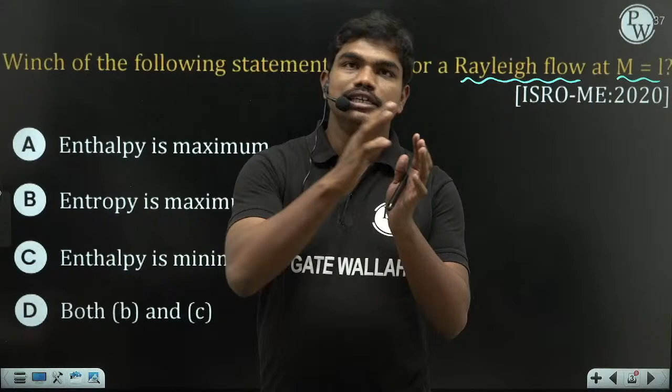So let us start solving these questions. Which of the following statements is true for Rayleigh flow? Okay. So Rayleigh flow at Mach number is equal to 1 basically here. Mach number is equal to 1 is, like last time also we discussed, the transition basically; subsonic flow से supersonic flow के बीच में actually Mach number is equal to 1 हो जाएगा.

And now if you see what are the specialities of this Rayleigh flow. पहले Rayleigh flow क्या होता है? So let us study that. Rayleigh flow is like flow in a duct, 1D flow in a duct.

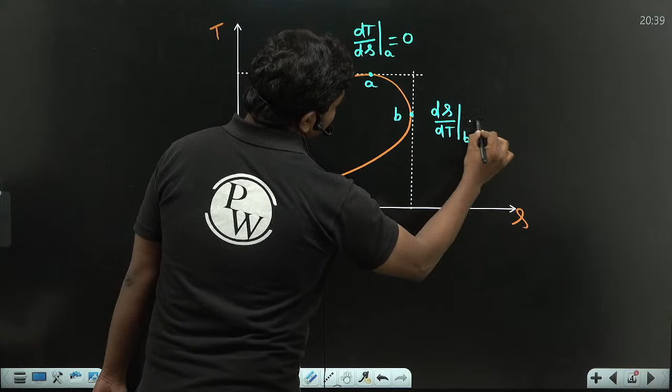And मैं detailed analysis नहीं कर रहा हूँ अभी लेकिन if you do this analysis you will understand certain points, that at this location Mach number का value होता है Mach number is equal to square root of 1 by gamma actually here. Okay. So gamma is adiabatic index of this ideal gas. Adiabatic index of ideal gas.

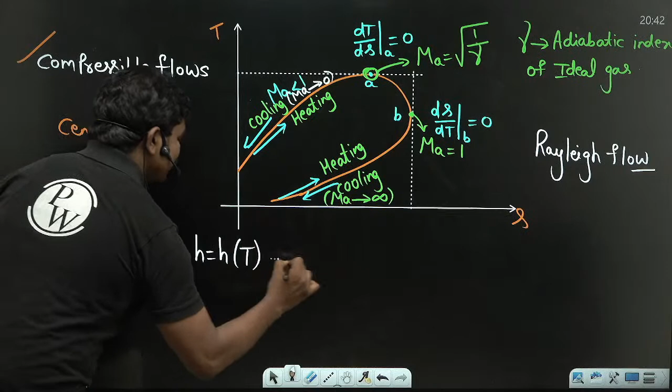Enthalpy is maximum. Tell me one thing, अगर आइडियल गैस का एंथैल्पी मैक्सिमम होना चाहिए तो टेम्परेचर क्या होना चाहिए? What should be the temperature if enthalpy has to be the maximum? It's an ideal gas, okay. So at ideal gas, if enthalpy has to be maximum, what should be the temperature? Temperature should also be maximum, correct? Yes or no? Type in the chat box.

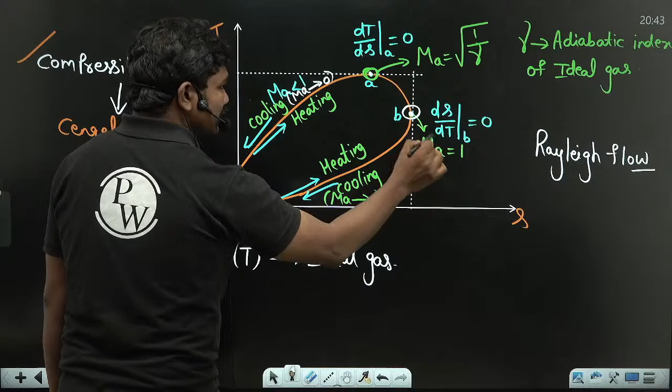Entropy is maximum, बिल्कुल. So you can see this is the point where ds by dT is 0 actually here. So therefore in this case, even though there is a temperature change, ds is basically 0. So s has achieved a maximum value here, okay. So this value is S max, and correspondingly this value is T max. Of course if T maximum है तो this is also the location of H max actually here. So entropy is maximum, this statement is true.

Enthalpy is minimum, no, क्योंकि बहुत सारे पॉइंट्स होते हैं जहाँ टेम्परेचर इससे नीचे होता है, okay. So therefore this point is also wrong, so definitely both A and C are wrong. So entropy is actually maximum at Mach number equal to 1, and this concept is very very important. Normally the concept of normal and oblique shocks, please go through this chapter before going for the examination, from that particular book Cengel, okay.

So please type in the chat box, are you all clear with this question? Everyone, please type in the chat box, are you all clear with this particular question?

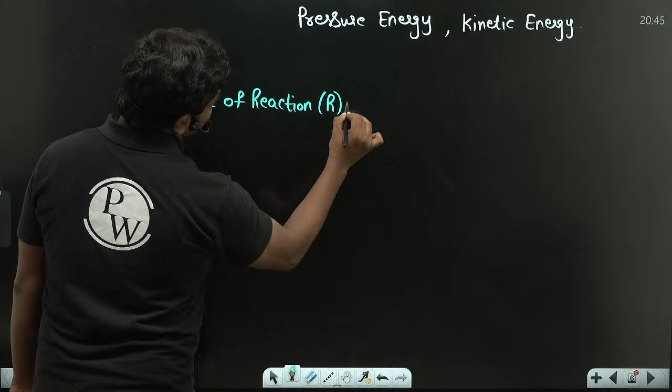Kinetic energy. Now depending on the availability of the pressure energy at the inlet, we define a quantity called degree of reaction, normally denoted by R. This is equal to change in static head, or pressure head, in rotor - it's a standard definition in all turbo machines - divided by total change in head in the stage. Suppose state 1 to state 2 you are compressing, then in this complete compression we will have some part because of change in pressure head, and total compression is there. This ratio is called degree of reaction.

So therefore, change in static enthalpy rise in the rotor - so this is actually the ratio of static enthalpy rise in the rotor to static enthalpy rise in the complete stage. This is not in the stator, but in the complete stage. So this is total change in head, static head, in rotor, divided by total change in static head - basically the pressure conversion in stage. Out of this total stage, whatever part is in the rotor, that defines the degree of reaction.

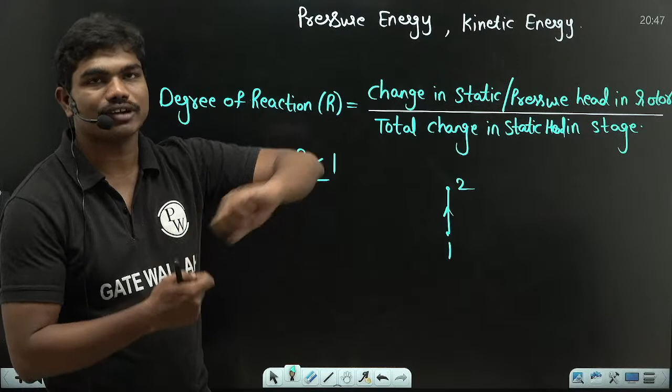And for impulse machines, like impulse turbines, this value will be 0 - degree of reaction equals 0 in that case. But some machines like Francis turbine, Kaplan turbine, and normally compressors, have this value of R changing from 0 to 1. Generally the theoretical range is 0 less than R less than 1, which is change in static pressure head in the rotor divided by total change in static head within the complete stage of compression. This definition is even the same for turbines.

So therefore this value is option C - option C is actually the correct answer, because this is the exact definition. Rotor to static enthalpy is wrong, but rotor to static enthalpy rise in the complete stage is what we consider in this definition of degree of reaction. This definition is a very common and standardly asked definition in all turbo machinery problems.

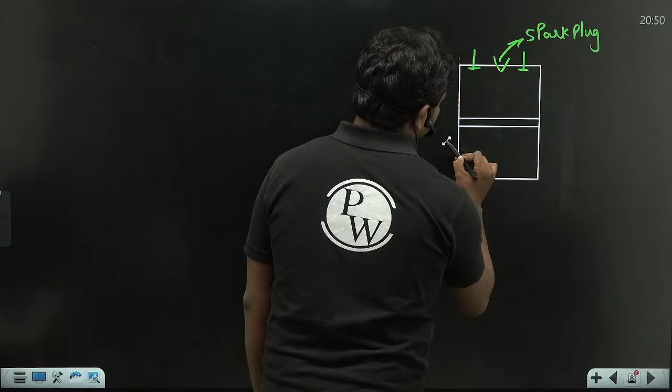So this is the piston, and at the bottom you have the crank, the crankshaft, all these things are here.

Now, in the beginning of the compression stroke, when the piston is at the bottom dead center, when it moves to the top dead center finally, meanwhile if the octane number of the fuel is low, what happens at that time? You will have small pockets of fuel getting segregated, because when the piston is moving, immediately the pressure inside the cylinder increases. So when this pressure increases, we have some small formation of fuel pockets.

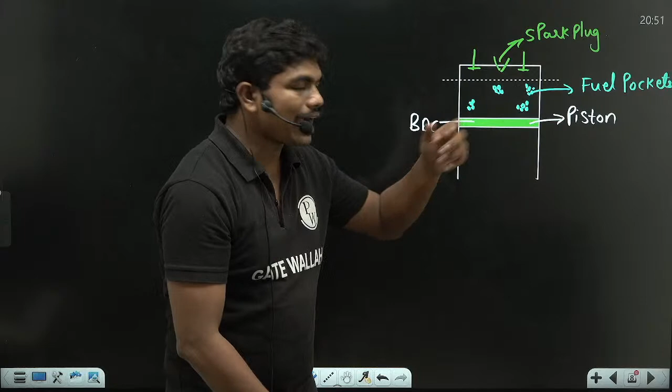These are called fuel pockets. And when you have these local fuel pockets, this will cause some pre-ignition. So by adding certain additives or by making some adjustments in the compression ratio, you have to avoid this pre-ignition.

Basically, what happens if there is pre-ignition? Engine knocking, that knocking sound will come. So this engine knocking will be there in case of pre-ignition. To avoid this pre-ignition or engine knocking, the octane number has to be increased.

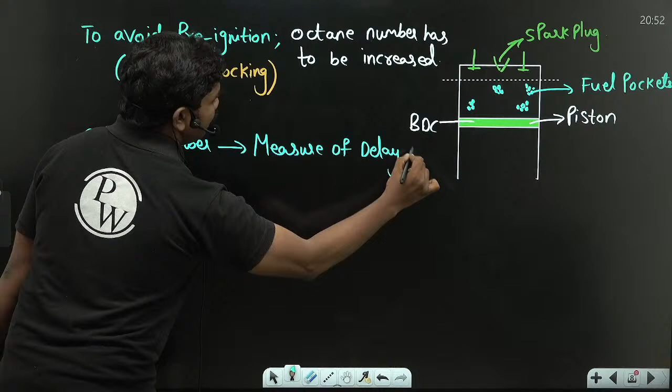Now what does this cetane number do? cetane number is a measure of delay in ignition. So this is about the pre-ignition, and this is about the delay in the ignition.

Now whenever there is a delay in the ignition, what happens? Maximum, your power comes down. But ideally, if the engine has to work efficiently, the ignition has to happen right on time. When the spark plug fires at that time, we have to make sure that complete ignition happens there. Now what happens here is, let us suppose to improve the quality of the fuel...

What do we have to do? The octane number has to be increased. And since cetane number is the measure of delay in the ignition, if we want to reduce the delay, the cetane number also has to be decreased a bit. So cetane number has to be decreased, actually, in this case in IC engines.

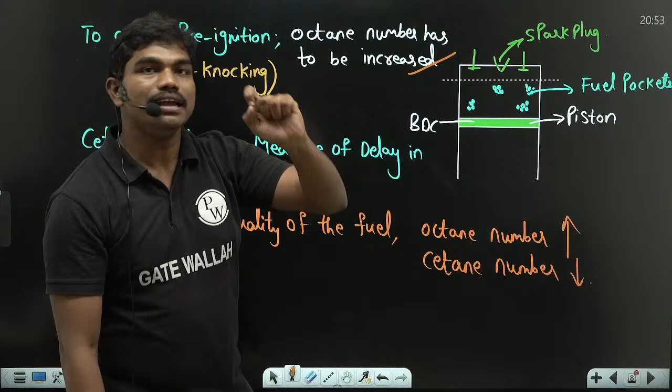Now whenever you are increasing the octane number and decreasing the cetane number, it's because you don't want pre-ignition to happen. You want the fuel to go till this point without igniting, and also you don't want any delay in the ignition. When the piston is at this point, then definitely you have to have the combustion. So therefore this cetane number should be low; there should not be any lag in the ignition and also there should not be any pre-ignition.

So can you tell me the relationship between these two? For the quality of this fuel, the octane number should increase and the cetane number should decrease. So tell me, what could be the relation between these two for the performance of this fuel? How does cetane number vary with octane number in fuels in IC engines in general? Now looking at these options, please tell me how we can actually relate these two quantities. One number has to increase and one number has to decrease for the best performance of the fuel. So out of these relationships, which one is actually correct? Everyone, just think and tell.

So for the better performance of this fuel, one number has to go up and one number has to come down. So if one number goes up and one goes down, what is the relationship between these two? They are inversely proportional to each other. This is inversely proportional to each other - octane number and cetane number. The delay should be minimized and pre-ignition should be avoided. So that's why this is actually inversely proportional to each other.

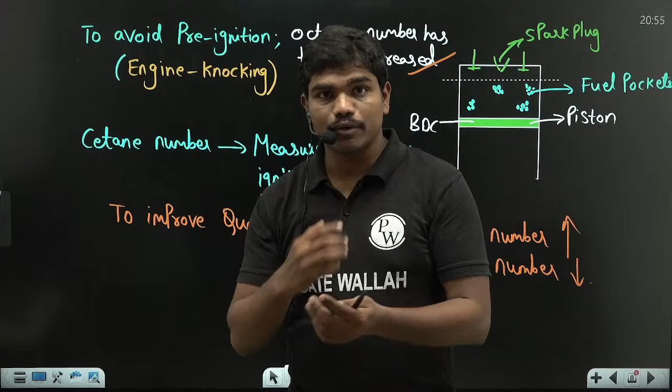Okay, but later their experimentation gave results that TEL is very harmful to lungs of humans. When we mix TEL with fuel and run it in an engine, it releases dangerous gases from the engine, so they are very dangerous for humans. That's why this TEL, tetraethyl lead, which was once upon a time a very famous anti-knocking agent, is not used at any location right now.

So that's why, to improve the quality of this fuel, nowadays we generally go for hybrid engines and also compression ratio manipulations. Normally we have VCR engines, variable compression ratio engines. Depending on the type of fuel, you can manage and adjust the compression ratio of the engine. So these are the things.

Now let us see, in an ideal gas turbine cycle with intercooling, reheating and regeneration, as the number of compression and expansion stages are increased, which of the following statements are correct? The Brayton cycle reduces to the Ericsson cycle. The Brayton cycle reduces to the Stirling cycle. The cycle efficiency becomes equal to Carnot cycle efficiency. Out of this, which statements are correct?

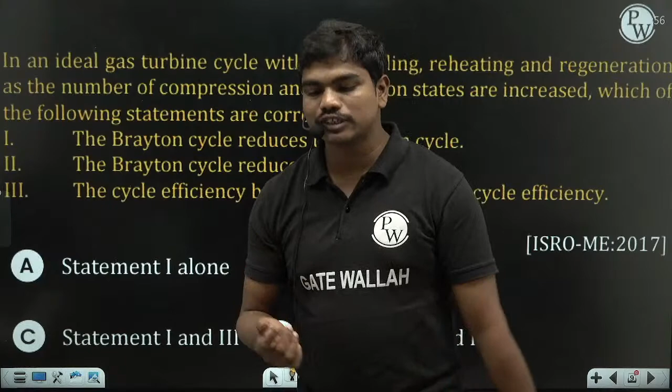So when we discussed the Brayton cycle last time, we also discussed its TS diagram. So let us go with the TS diagram.

Normally the Brayton cycle, if you see, will have a combustion, or normally PV diagram—if you go for PV diagram also, not an issue, better PV diagram because you might be comfortable, it's like Stirling and Ericsson cycles. So if you have P versus specific volume diagram, first stage is isentropic compression.

One to two. Basically, if you try to do analysis with the help of Carnot cycle, then compression is isentropic, expansion is also isentropic, heat addition is at constant pressure, heat rejection is also at constant pressure. So this cycle will look something like this: constant pressure heat addition, then isentropic expansion, and constant pressure heat ejection. So this is isentropic compression, constant pressure heat addition, isentropic expansion, and constant pressure heat rejection.

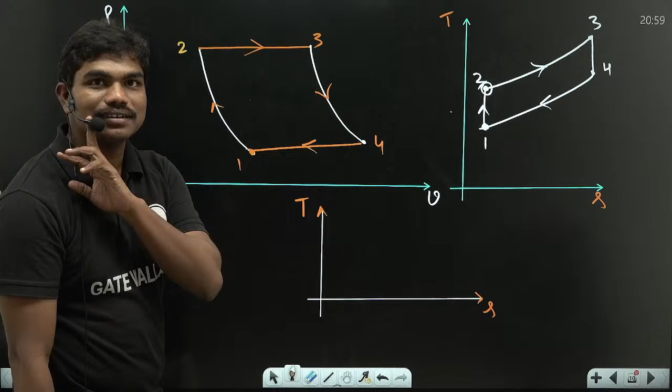Okay, fine, so let us see this. Whenever you take this TS diagram, whenever you are increasing the combustion stages, normally you do the combustion this way: combustion, then intercooling, then again combustion, then intercooling, again combustion and so on. So whenever you try to closely pack all these things, you will generate some curve like this. Then whenever you are doing reheating, normally once you expand, then again you go for reheating, again you expand, again you go for reheating.

Again you expand, again you go for reheating. So whenever you increase the stages, this will be almost like this line, and again this. Finally here also you will have this kind of lines. So you can understand this process, which is the heat addition process 2 to 3. That comes out to be something like this, which is the heat addition here, and this is the heat rejection. And here this will be almost like an isothermal case.

And since you are doing this at constant pressure, these will be almost like the constant pressure curve in the TS diagram, and this becomes P is equal to constant. So whenever you talk about this Brayton cycle in the actual case, it comes out to be the Ericsson cycle. So this becomes an Ericsson cycle, but not a Stirling cycle, because in the Stirling cycle you have constant volume heat addition and rejection. So we have the statement: the Brayton cycle reduces to the Ericsson cycle.

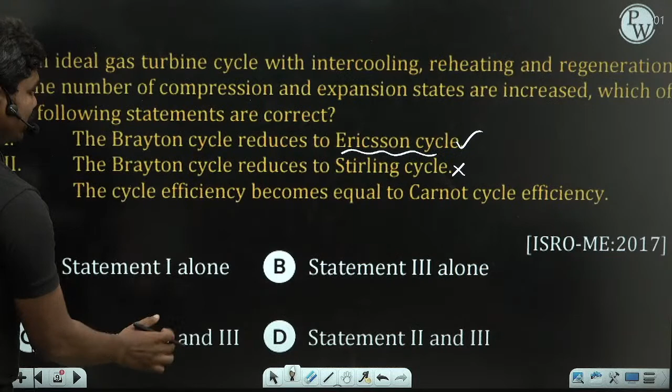So statement 1 is correct. Then what about statement 2? This does not come to be a Stirling cycle, so statement 2 is wrong, and this option is wrong. The cycle efficiency becomes equal to the Carnot cycle efficiency. If you compare Stirling, Ericsson and Carnot cycles, the temperatures of heat addition TH and TL remain the same. So the Carnot efficiency is the same as the Stirling efficiency and the Ericsson efficiency, so the cycle efficiency theoretically becomes equal to the Carnot cycle efficiency.

So this statement is correct. Option C: 1 and 3 are correct. The Brayton cycle will reduce to the Ericsson cycle, and the cycle efficiency becomes equal to the Carnot cycle efficiency, because Ericsson, Stirling and Carnot all have the same efficiencies, since they operate under the same temperature range of constant temperature heat addition and constant temperature heat rejection. So statement 1 and statement 3 are correct.

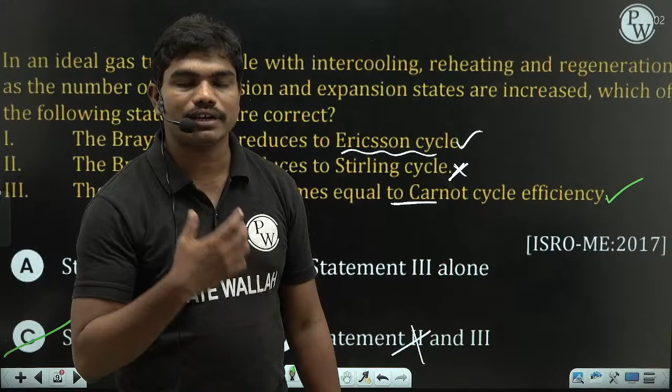And I have told you about one book. This book has the exact data of this statement, because I taught applications of thermodynamics for quite some time. It has the same statement in the same order: in an ideal gas turbine cycle with intercooling, reheating and regeneration, as the number of compression and expansion stages are increased, the cycle approaches the Ericsson cycle, and theoretically the efficiency becomes equal to the Carnot cycle efficiency. So statement 1 and statement 3 are correct.

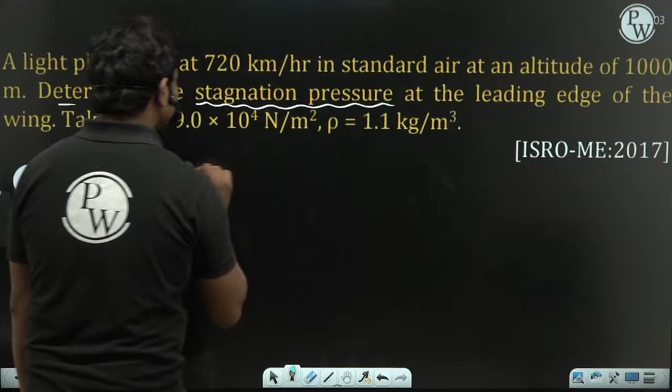A light plane flies at 720 kilometers per hour in standard air at an altitude of 1000 meters. Determine the stagnation pressure at the leading edge of the wing. They are talking about the stagnation pressure, and last time I already gave you this: P stagnation is equal to P air plus half rho V squared. It is flying in standard air at an altitude of 1000 meters. So P air plus half rho V squared. So how much is P air?

P air is 9 into 10 power 4 newton per meter square, and the options are in kilopascals, so let us convert this into kilopascals: 90 kilopascals plus half times rho 1.1 into V squared. What is V? 720 kilometers per hour. Convert that to meters per second by multiplying by 5 by 18. This value comes out in complete SI units, not in kilopascals.

To convert that to kilopascals, because this value will be in just pascals, we are dividing with 1000 to make pascals into kilopascals. V square is 720 into 5 by 18 here. So 18 cancels out this 4 times, and a 0 comes out. So 4 5s are 20. So this is 200 square.

So if you simplify this, 90 plus half times 1.1 into 4 into 10 power 4 divided by 10 cube. So this is the value that you have here. If you simplify this, 10 cube will cancel this 10 power 4, and this will become 11 directly. And 2 will cancel this 2 times. So 90 plus 22 gives you 112 kilopascals.

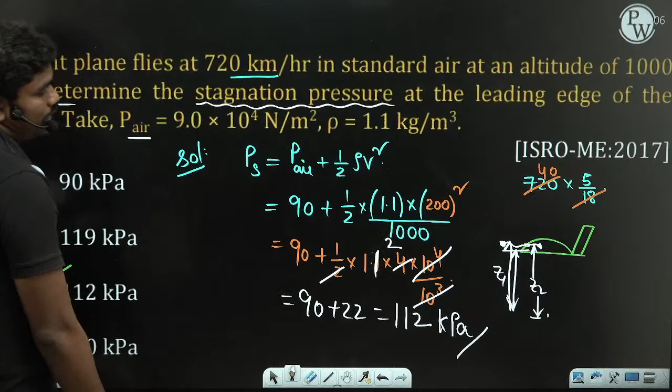Because if the flight is flying at this height, then definitely the leading edge of the wing will also be at the same height. So whenever the air molecules coming are at potential head Z1, by the time they are about to hit this, the value Z2 is the same. So even though you are bringing it adiabatically, the potential energy will remain same. Therefore 112 kilopascals is the correct answer in this case.

Clear to all of you?

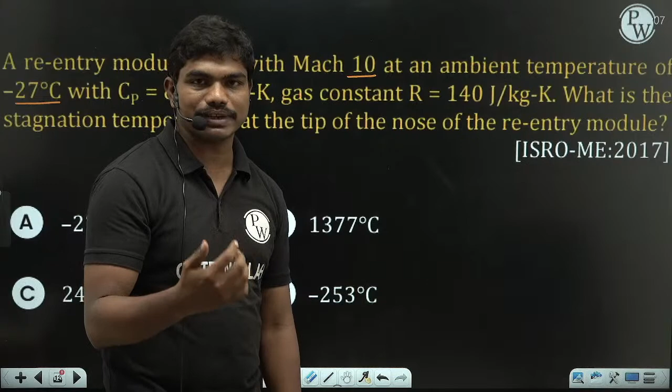Now let us go for the next question. A re-entry module flies with Mach number 10 at an ambient temperature of minus 27 degrees Celsius. So what are re-entry modules? In space, we have some re-entry space flights. With Cp equal to 840 joule per kg Kelvin and gas constant R equal to 140 joule per kg Kelvin, what is the stagnation temperature at the tip of the nose of the re-entry module?

Let us suppose this is atmospheric. Whenever the flight is entering here, at the tip of the nose the air will be at a stagnation point, because whenever the body is coming, air will try to flow like this. So the tip of the nose, somewhere here, will be the stagnation point. Then what is the stagnation temperature at the tip of the nose of the re-entry module?

Let us calculate the tip temperature. I have already given you Ts equals T infinity plus V square by 2 Cp last time, correct? I have also given you some slides on how this formula is derived. Do you remember that? Yes or no? Type in the chat box. Do you remember this expression?

Yes or no? I have also given you some slides and told you that this is very important for ISRO. You can see almost every year there is a question on stagnation properties: stagnation temperature, stagnation pressure, all. Whoever attended the last session knows, I gave you all this formula. Now Ts, the stagnation temperature, is equal to T infinity plus V square by 2 Cp. Now here Mach number is given to you.

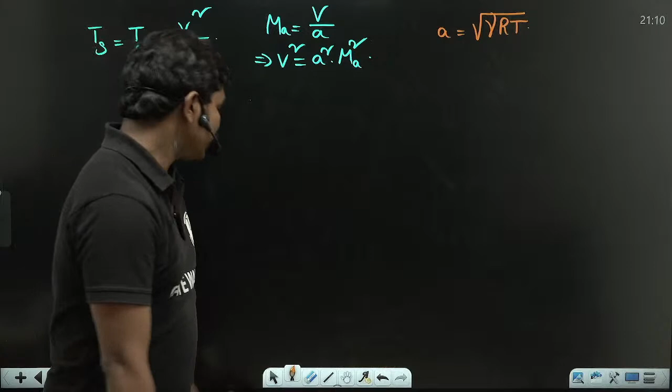Now Ts is equal to T infinity plus V square, with T infinity at the same ambient condition. V square can be written as A square into Mach number square. So what is the A square value? Gamma R T infinity into Mach number square, by 2 times Cp. We can write Cp as gamma R divided by gamma minus 1.

When you cancel gamma R, T infinity is common in both terms. So Ts is equal to T infinity times 1 plus; gamma minus 1 is in the denominator of the denominator, so it goes to the top. So Mach square into gamma minus 1 divided by 2 is the final expression. Now let us take the values.

T infinity: what is the temperature of this module at this time? The ambient temperature is minus 27 degrees Celsius. So 273 minus 27, which is 246 Kelvin. What about the Mach number? It is also given: this flight is entering at Mach 10. So Mach number is equal to 10.

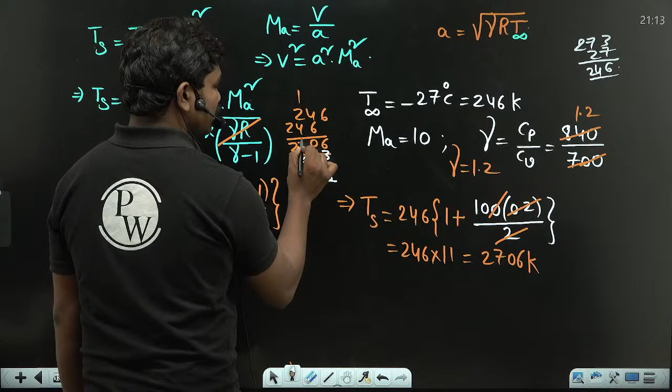2706 Kelvin. Now if you see the options, these values are in degrees Celsius. So if you calculate this in degrees Celsius, let us check: 2706 minus 273. 6 minus 3 is 3, 10 minus 7 is 3, 6 minus 2 is 4, so 2433 degrees Celsius. Around 2400 degrees Celsius is what you have here.

So if you check the values, around 2477, you can say this is the closest value. So 2477 is what you can take, because this calculation we have done exactly, but the value could be around 2400 degrees Celsius. Normally this re-entry concept is very dangerous.

Do you know about Kalpana Chawla ma'am? Actually, the first female astronaut from India. Do you know? How many of you know this? You know why she died or what happened to her? The complete team, actually. At that time, yes, died in the rocket. So Kalpana Chawla ma'am is the first woman astronaut from India. She worked for NASA, National Aeronautics and Space Administration, the US agency.

So in this question, if you see, the re-entry module is entering the earth and you can see that level of temperatures, 2433. So at that level, the re-entry module caught fire and it blasted, and all of them lost their lives, because this is the temperature range at which it enters the earth.

Sometimes at these high temperatures, it catches fire very easily because of the friction between the air molecules and the plane. Clear? Whenever things are hot, it's very easy for them to catch fire. So things like that. Around 2400 degrees Celsius, so you can round this off accordingly.

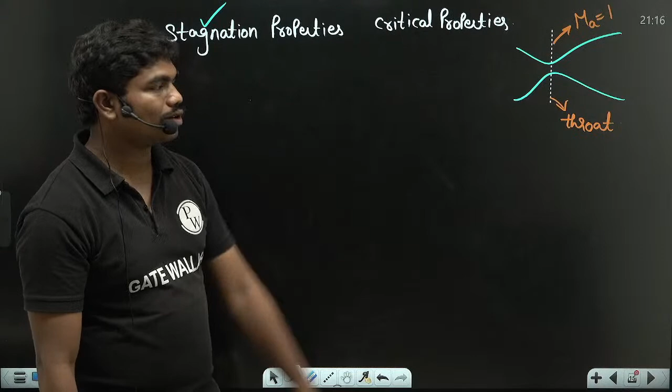So whenever the Mach number is equal to 1, the properties at that particular situation are called the critical properties. This state corresponds to Mach number equal to 1. This state corresponds to velocity equal to 0. Whenever the complete fluid is brought to rest adiabatically, those properties are called the stagnation properties.

The derivation I cannot do right now, because I have to start with the continuity equation and also the steady flow energy equation of this nozzle. So right now I am just giving you values. These values are denoted by the subscript S or sometimes naught. So PS or P naught, TS or T naught. Similarly, one very important thing is density, stagnation density. This is how they are denoted.

Critical ones are denoted with P star, T star and also density star. Now whenever you see these values, T star divided by T naught, critical temperature to stagnation temperature, this value will be 2 by gamma plus 1, depending upon the type of fluid.

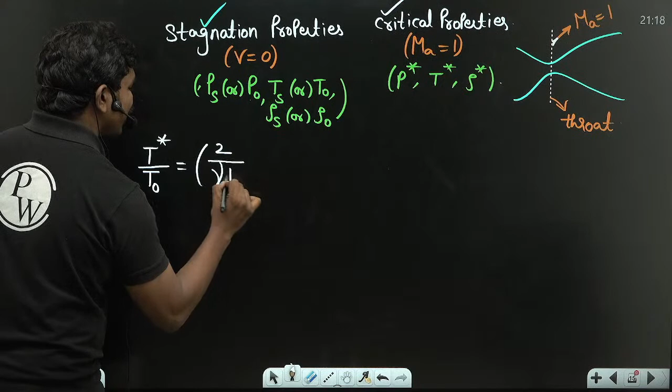Okay, this analysis is not very simple. You have to do a bit of mathematics, steady flow energy equations, continuity equations and all to derive this, taking Mach number equal to 1 in the formulas. But right now I am just giving you this. T* by T0 is 2 by (gamma plus 1).

And P* by P0 is equal to [2 by (gamma plus 1)] whole power gamma upon (gamma minus 1). So this is the ratio of critical pressure to stagnation pressure. Normally in case of boilers also you can study this. And density* by density0 is equal to [2 by (gamma plus 1)] whole power 1 by (gamma minus 1).

This is not characteristic gas constant, this is actually gamma. Here also it is gamma, because some of you may feel this is looking like characteristic gas constant. So 2 by (gamma plus 1) whole power 1 by (gamma minus 1).

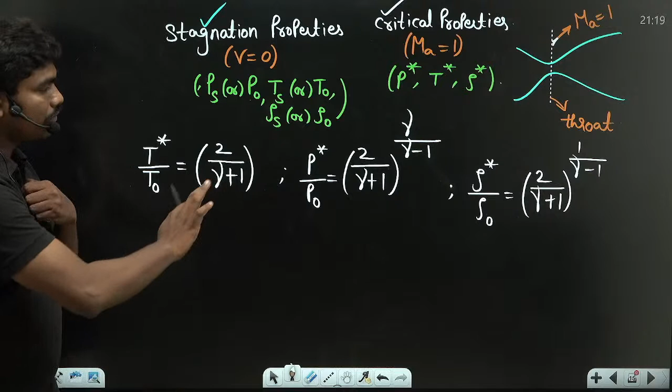Fine. For now please keep the values, but please remember whenever you bring a flow isentropically to static condition, local velocity is equal to 0. So this is the stagnation point. And any point in this regime is called the critical point, or critical regime. Mach 0.99 to 1.01 is what we will take. So that regime is called the critical regime.

Okay. So will you take ATD in Vijay batch? Yes, I'm going to take ATD, applications of thermodynamics, in Vijay batch. Okay. Now, so these are the things.

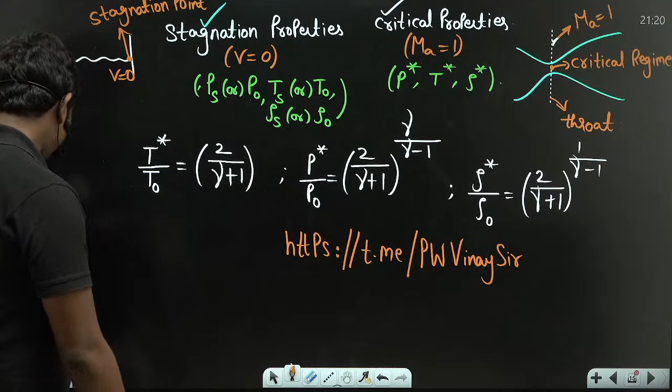I'm telling you guys, for ISRO compressible flows is a very important topic. Please study the topic before going for the exam. Definitely one or two questions will come from it. Fine. And also I suggest you study thermodynamics, fluid mechanics, and heat transfer at a good level, so that whatever questions come from there, you can answer 100%.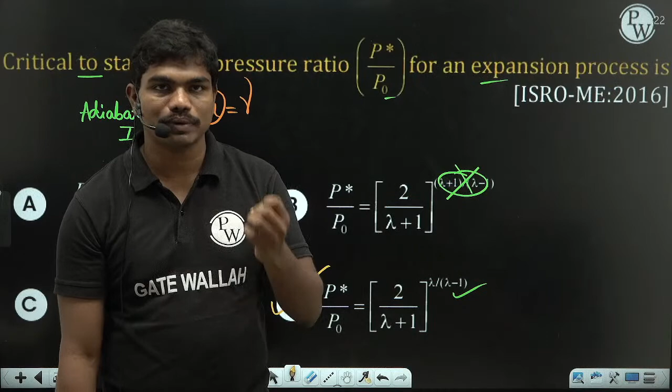Because engineering mechanics and strength of materials, you might have seen the PYQs also; if you have some general basic idea, you can easily solve them. But these compressible flows or turbines, what I have discussed, you don't look at those topics much in GATE examination. So please put some extra effort in those topics. Clear to all of you?

Okay, so this is basically the things. Whenever we do compressible flows, I'll show you the derivations of these ratios. Last time when I taught ATT a while back, I covered all these topics, but right now I'm just giving you some data for now.

So, the Seebeck effect is actually related to thermocouples. Not related here, but normally when you do temperature measurement, the Seebeck effect is based on thermocouples, based on the metal differences and all. But there is some effect of back pressure in case of nozzles, compressible flows and all. That's again a very good and lengthy concept, like normal shocks and oblique shocks, all these shock wave topics we have to cover, but right now we are not doing that.

Now let us see this. Efficiency of a Carnot engine is given as 80%. If the cycle direction is reversed, what will be the value of the COP of the reversed Carnot cycle? So can you please tell me?

So can anyone tell me what will be the value of the reversed Carnot cycle? Good evening, Deja. Please type in the chat box. COP, efficiency of a Carnot engine is 80%, that's 0.8. So what is the efficiency of the reversed Carnot engine, or reversed Carnot cycle here?

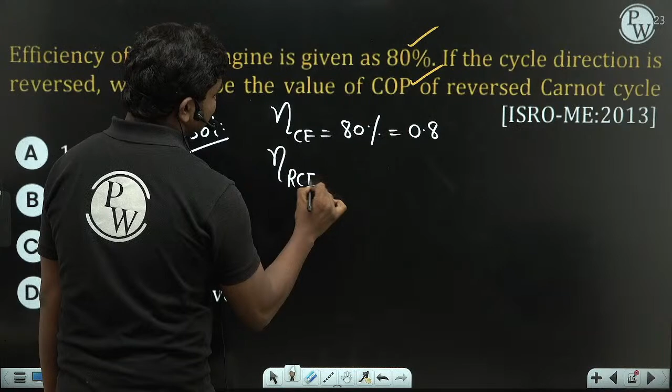Do you know the relation between thermal efficiency, efficiency of a heat pump, and efficiency of a refrigerator? Let us suppose there is a cycle running on a Carnot cycle, operating between some temperature limits.

Let me give you some data quickly. If you have a temperature TH, which is the source, supplying heat to a reversible heat engine, a Carnot engine, and you also have a TL, a sink, to which heat is ejected. So let us suppose this is QH, which produces some work W, and this value is QL.

So thermal efficiency of this Carnot engine is 1 minus TL by TH, which is TH minus TL by TH. This formula is nothing but the coefficient of performance of the heat pump operating within the same temperature limits, with all three directions QH, W, and QL being reversed, because a heat pump is a power consuming device. So whenever you reverse this work input, heat gets transferred from low temperature to high temperature.

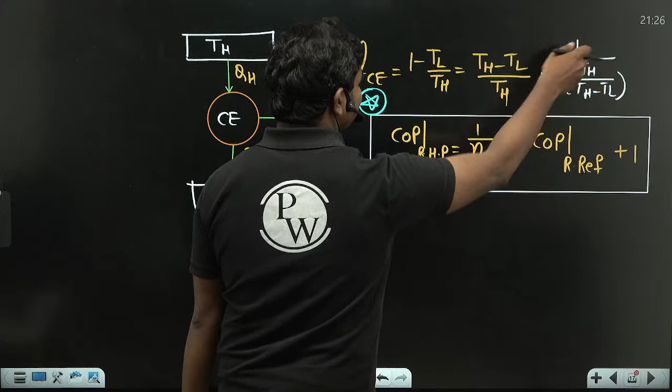This formula is very simply derived like this, and if you want to know that COP of the reversible refrigerator is TL by TH minus TL, if you simplify again you get the expression for COP of reversible heat pump. So therefore, let us see here, thermal efficiency for this reversed Carnot cycle, reversed Carnot engine.

So whenever the heat engine is reversed, it works as a refrigerator. So this is 1 by 0.8, which gives the COP, normally we denote this with COP. So COP of reverse Carnot engine is 1 by 0.8 minus 1. This is the reversed Carnot cycle; similarly reversed Rankine cycle, reversed Brayton cycle, all these are refrigeration cycles. So whenever you reverse this Carnot cycle, 1 by 0.8 gives the COP of the heat pump, but since you want the refrigeration COP, it is 1 by 0.8 minus 1. Clear to all of you?

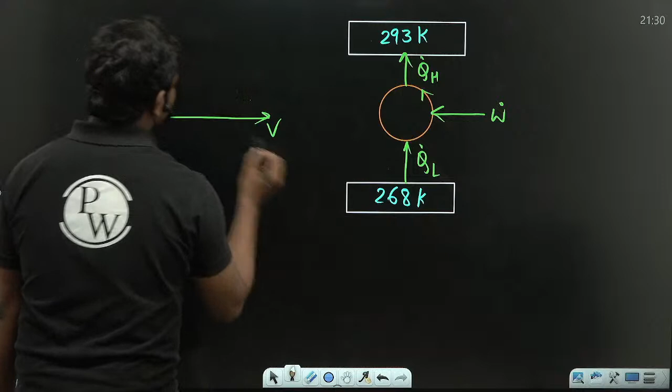Let us suppose you have a PV diagram, and you are trying to create a cyclic process, 1 to 2 and 2 to 3, something like this. If you create the cycle in this direction, you can clearly understand from 2 to 1 volume is decreasing, so it's compression, and 1 to 2 volume is increasing, so it's expansion. So the magnitude of work in the compression is less compared to the magnitude of work in the expansion process. So whatever is not the common portion is the net work generated by the cycle, and so you get a clockwise direction.

But if the cycle is in the reverse direction, then the work required for compression will be more, and the net work interaction in the cycle will be negative. So you can write that all power producing cycles are in the clockwise direction, like Otto, diesel, dual, Rankine, Brayton, Stirling, Ericsson, all these cycles are clockwise. But when you talk about VCRs, vapor compression refrigeration cycles, they will be in the anti-clockwise direction because you supply work input to the compressor.

Okay, so anyway, 268 Kelvin. Let us see what they're talking about. The refrigeration removes heat at 0.35 kilojoule per second, so this is 0.35 kilowatts. Let us say kilojoule per second is nothing but kilowatts. Then what they're telling? The minimum required power input is dash watts.

So power input, coefficient of performance is equal to... this is a reversible cycle? No, they have not given you that. Fine. Then for the minimum power, if this has to be minimum, then definitely the cycle has to be a reversible refrigerator, because only then will this be minimum, otherwise it will be something more than that minimum value. So since this is a refrigeration cycle, COP of reversible refrigeration can be written as desired effect.

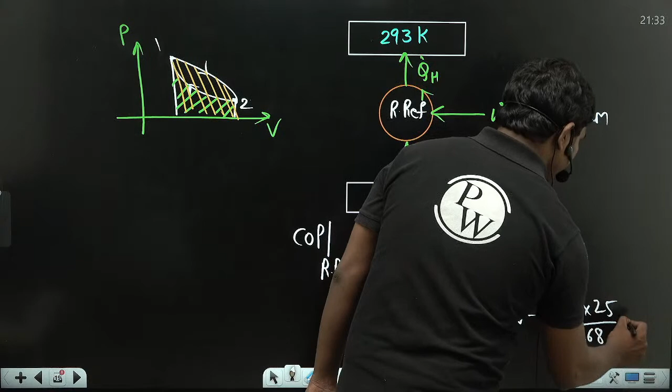So then if you calculate these values, then the required power input, what is that value? 0.35 kilowatts. This is kilowatts, but these answers are in watts. So if you multiply by 1000 here, then this value becomes watts. So W dot is equal to some watts.

But how to do this calculation? Try to understand one thing: you can do this very simply. This value, 25 divided by 268, is almost equal to 0.1, slightly less than 0.1, almost 0.09 of that range. So whenever this is around 0.09, this total value, 0.35 into something slightly less than 0.1, will be slightly less than 0.35.

So that means around 33, 34 within that range. So if you do this calculation, you will end up with 33 watts around. If you want, this is 350 into 25 by 268. Since calculator is not allowed, you can simplify: this is 175 and this is 134. So this value is 175 times 25 divided by 134. With some tables and calculation, you will easily end up with 30, and it will definitely be more than 30 since it won't be that much less.

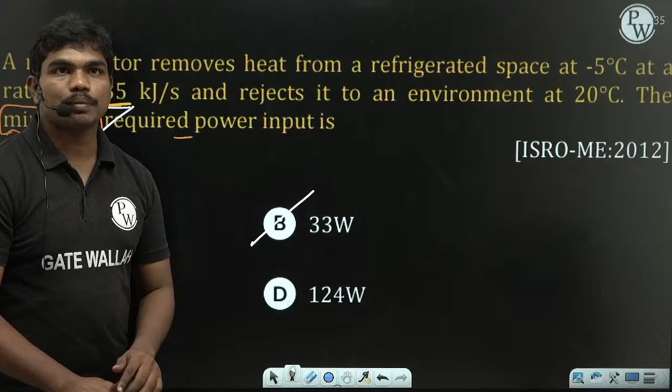So around 33 watts could be the correct answer. Are you all getting 33? If you have done the calculation, you will get it easily. So type in the chat box 33 watts. Is this clear to all of you? You can understand from this value also, it will be slightly less than 0.1, so 0.35 into something less than 0.1 will be close to 35, so 34, 33.5 something could be there. So 33 watts could be the actual approximation value in this case. Okay, 33 watts. Let's go to the next question.

For the same compression ratio, the thermodynamic cycles in order of decreasing efficiencies are... for the same compression ratio, definitely efficiency of Otto will be more as compared to efficiency of Dual, which will be more as compared to efficiency of Diesel. For the same peak pressure, thermal efficiency of Diesel will be more as compared to thermal efficiency of Dual, as compared to thermal efficiency of Otto. So the comparison is between Dual, Otto and Diesel cycles.

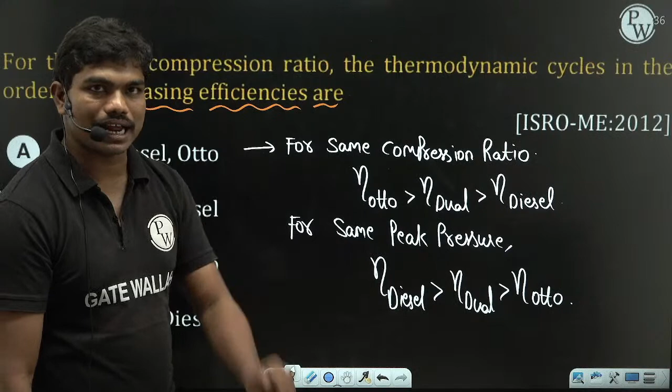Let us suppose you have the PV diagram, for example. Whenever the compression ratio is the same, so let us suppose in both Otto cycle and diesel cycle you have the same compression ratio, 1 to 2 of course. So this is compression. Now in this case of Otto, you have a constant volume heat addition, but here you can clearly understand it's a constant pressure heat addition.

Now you see this curve comes something close like this, and this will end up at constant volume. Similarly here also, this curve, let us suppose it's touching somewhere here, then in that case also this will be the adiabatic isentropic expansion, and this will be the point. Now in this case you can understand the work of Otto is actually more as compared to work of diesel.

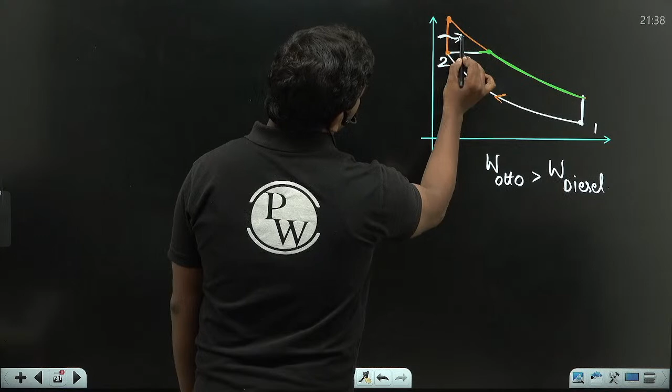And what about the heat interactions? You can write this expression in terms of 1 minus QR by QS. Now whenever the compression ratio is the same, in this case of constant volume heat addition, when the temperature of heat rejection is same, the temperature of heat addition will be considerably higher in the case of the Otto cycle, because you have already increased the pressure to this point, and further at constant volume you are increasing the pressure during the heat addition process. That means the temperature of heat addition in the Otto cycle is going to be large for the same heat rejection temperature in both the cycles.

So therefore, for the same heat rejection process 4 to 1, heat rejection is same in both the cases, but here heat is added at high temperatures. And as per your second law, thermal efficiency is equal to 1 minus TL mean by TH mean. So this TH mean will be large in case of Otto cycle, because after this point you are further increasing the temperature during the process of heat addition. So that's why this is the case.

And you can see QS minus QR in case of Otto will be more as compared to QS minus QR of diesel. And when the heat rejection process is same between the two cycles, then definitely heat supplied in case of Otto is large. So thermal efficiency is equal to 1 minus QR by QS. In this expression QR remains same, but QS is more for Otto. So efficiency will be definitely larger for Otto cycle at same compression ratio.

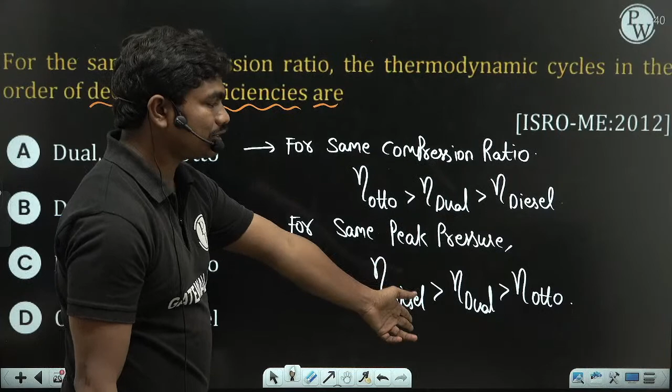Similarly, by graphical analysis you can talk about the diesel cycle for the same peak pressure. Whenever peak pressure is same, you will end up with the result that diesel has higher efficiency as compared to dual, as compared to Otto. How can you show this mathematically? Thermal efficiency of Otto is 1 minus 1 by R power gamma minus 1, correct? And thermal efficiency of diesel is equal to 1 minus 1 by R power gamma minus 1 multiplied with rho power gamma minus 1 divided by gamma times rho minus 1. So this is the value.

Now if you try to simplify this, you will find that this value is definitely greater than 1. If you use a bit of mathematics, you will easily understand this value is going to be more than 1, because this is rho power something, rho power 1.4 something like that, and as rho tends to 1, your diesel cycle gets converted to Otto cycle.

Otto cycle. What is the physical meaning of this? In this case, this is the heat addition process. 2 to 3 is the heat addition at constant pressure in this diesel cycle. So at constant pressure, whenever this cutoff ratio is tending to 1 — cutoff ratio is actually equal to V3 by V2, right? So whenever rho tends to 1, this implies V3 is very close to V2, of course.

Whenever V3 is very close to V2, you don't have enough movement of the piston, so this will be very small. That means the volume change is very small, so you can approximate the heat addition as at constant volume, which is the same principle as the Otto cycle. And mathematically, if you apply L'Hospital's rule, you will get this as rho tends to 1. Look, I will show you.

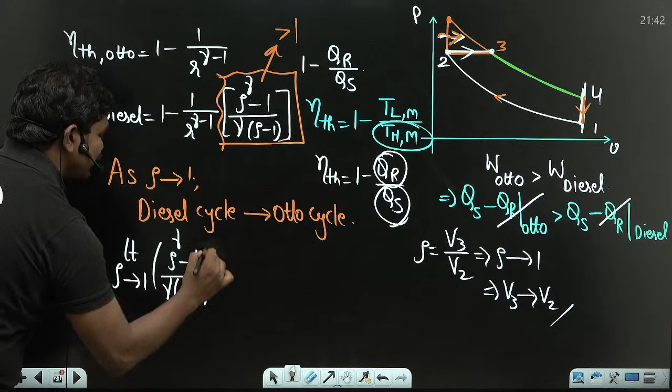As rho tends to 1, limit rho tends to 1, rho power gamma minus 1 by gamma times rho minus 1. This will give you 0 by 0 form directly, because 1 power gamma is 1, 1 minus 1 is 0. So if you apply L'Hospital, the derivative of this term is gamma times rho power gamma minus 1, derivative of 1 is 0, divided by gamma times derivative of rho, which is 1.

So gamma and gamma get cancelled. When you put rho equal to 1, the total term will be 1. Whenever this term becomes 1, the expression for the diesel cycle will be the same as the expression for the Otto cycle. So these are some important insights about the Otto and diesel cycles.

So anyway, at the same compression ratio, in decreasing order of efficiency, the highest will be Otto, followed by dual, and then diesel. So this is the order of decreasing efficiencies: Otto will have the highest, followed by dual, followed by diesel cycle.

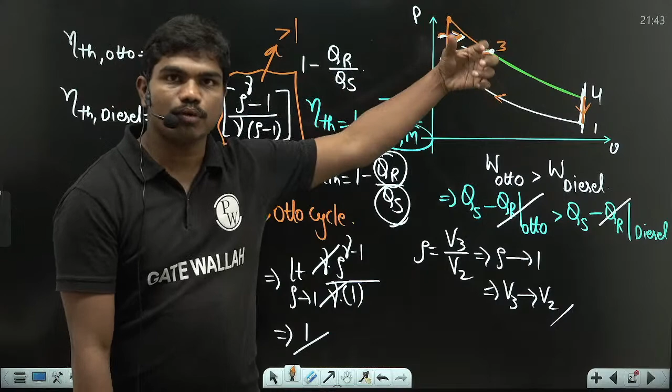Clear to all of you? Are you all clear with this explanation? Please type in the chat box. So this is mathematically, and this is from the thermodynamics point of view. Is this question clear to everyone? Clear? Fine. So let us solve this question.

Stagnation temperature, again 2011. The stagnation temperature of an isentropic flow of air, with gamma 1.4, is 360 Kelvin. If the temperature is 200 Kelvin at a section, then the Mach number of the flow will be what? Let us see. Ts is equal to T infinity plus V square by 2 times Cp.

We want Mach number, so V square can be written as acoustic velocity square into Mach square divided by 2 times Cp. A square can be written as gamma RT, so Ts equals T infinity plus gamma RT into Mach square divided by 2 Cp. And Cp can be written as gamma R divided by gamma minus 1.

Now if you simplify, gamma R and gamma R get cancelled, and this T is also T infinity. So Ts by T infinity is equal to 1 plus Mach square into gamma minus 1 divided by 2. This is an important expression, because if you take T infinity common, this is the term.

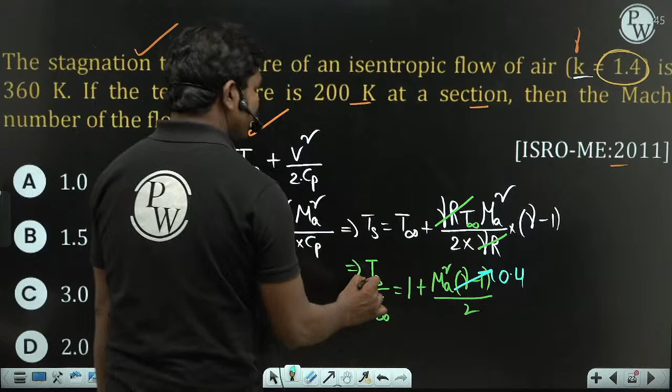They have given gamma equal to 1.4, so gamma minus 1 is 0.4. What about Ts? Ts is also given: stagnation temperature of the air is 360 Kelvin, and T infinity, the ambient temperature, is 200 Kelvin at a section. So let us see the value of Mach number.

Simple calculation. The 0 gets cancelled, this is 1.8. So 1.8 minus 1, 0.8, is equal to 0.4 times Mach square by 2. This cancels, so Mach square is equal to 4, and Mach number is equal to 2. Clear to all of you? So the Mach number value is 2 in this case.

Okay. So Mach number is equal to 2. You see how many times I'm writing this formula? I'm telling you guys, in thermodynamics exclusively and also in applications of thermodynamics, the level of questions that's being asked here in the latest trend, at least from 2017, if you see, majority of these questions I can show you are from Cengel.

Okay, Cengel and Boles. That's why in every thermodynamics course I start, in the first lecture, I tell you Cengel, Moran and Shapiro. Moran and Shapiro is more for the GATE examination, you can say, because a lot of problems will be analytical, with a lot of calculations.

So this Cengel and Boles is one very excellent book; it's like a story book also. No terminologies will be complicated in Cengel. Once you start reading the book, you can continue till the end of the book. If you use a little mathematical knowledge doing some derivations, that book looks very easy. Nowadays you guys are smart enough to download a copy from the internet, but I cannot show you. This is a live session, but you can try to get a copy.

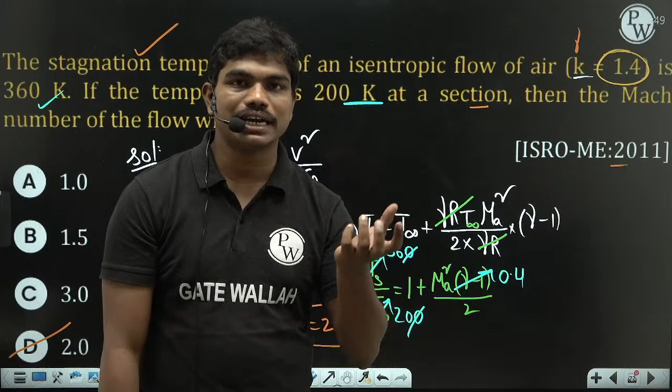Okay, fine. So, are you all clear so far? Shall we proceed from here? Come on, it's already 9:50. We have spent almost 1 hour 25 minutes. We still have some 40-45 minutes left, so be quick. Please type in the chat box: is this clear to all of you till this point?

Okay. Now let's solve the next question. For one-dimensional isentropic flow in a diverging passage, if the initial static pressure is P1 and the initial Mach number is M1 less than 1, then for the downstream flow... Diverging passage, you've got a diverging passage. So this is a diverging passage.

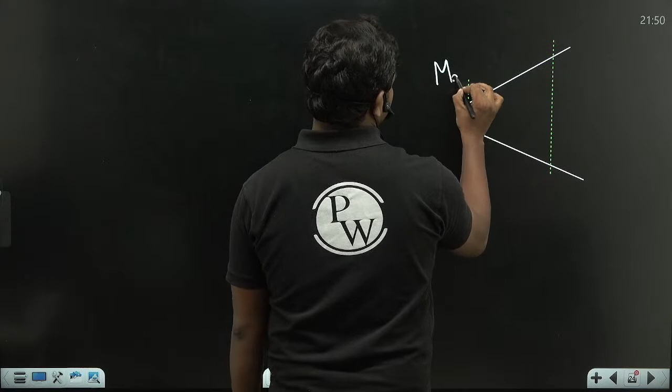So let us suppose this is section 1 initially. Somewhere downstream, somewhere here, for example, in the flow, let us see what is the case. Initially at this section, Mach number is less than 1. As I told you, in the last class I was talking about the diverging part of the nozzles, rocket nozzles.

Okay. In that last PDF, I have also given this derivation, dA by dV. dA by dV is equal to A by V into Mach square minus 1. I think equality sign directly, no constants. This is the relation. Normally I don't remember this; I generally derive this every time.

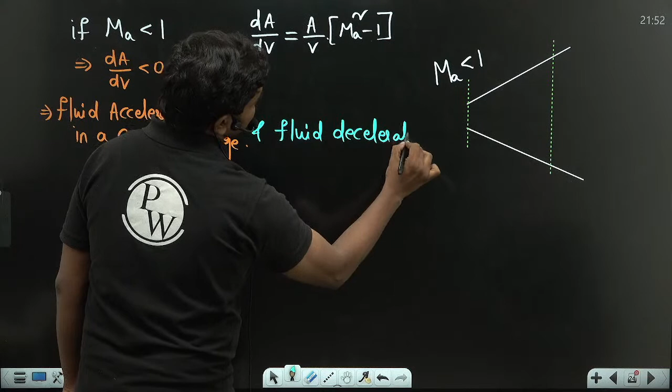But whenever you see this, you can understand if Mach number is less than 1, this implies dA by dV is negative. So this implies fluid accelerates in a converging passage. Here they have given you a diverging passage. So fluid decelerates in a diverging passage because velocity will decrease.

I have given you this result last time in the notes I attached, with Mach less than 1, Mach more than 1, and the transitions. So now velocity will decrease clearly because the Mach number of the flow is less than 1. Mach will further decrease. When Mach number is coming down, velocity will decrease. So V will come down.

When V decreases, apply Bernoulli's equation at this point and at some point downstream. Here velocity is V1, here the velocity is V2, so V2 is less than V1. Then for P1 and P2, since kinetic head is getting reduced, that kinetic head gets converted to pressure head. So P2 is more than P1.

Okay, so this implies velocity decreases and pressure increases here. This pressure will increase. Clear to all of you? Pressure will increase in this case. So velocity decreases and pressure increases.

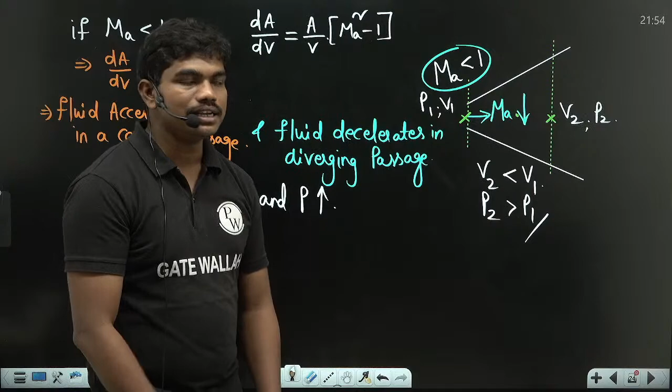Let us suppose they have given you the Mach number at the inlet is more than 1. Then in that case, anyone? Please type in the chat box: if Mach number is more than 1, what could be the things? Vice versa, right? Your velocity will increase in the diverging passage and pressure will come down. So pressure decreases in that case.

I thought of telling you one thing in the last class, but I forgot. You all know this name, IISc, correct? Indian Institute of Science. Now, IIST, have you ever heard this? Any one of you? You all know Indian Institute of Science, top institute. In intermediate, you have heard about it. Good. For +1 and +2 students, this college is very special. Space Tech, yes. This college is the Indian Institute of Space Science and Technology.

So if you see, this is like the first of its kind in Asia generally. So I would like to show you some data about this. Why? What is the specialty about this? It was actually started when Abdul Kalam sir was the President of India. I would like to show you some images. It is at the bottom of the Sahyadri Hills.

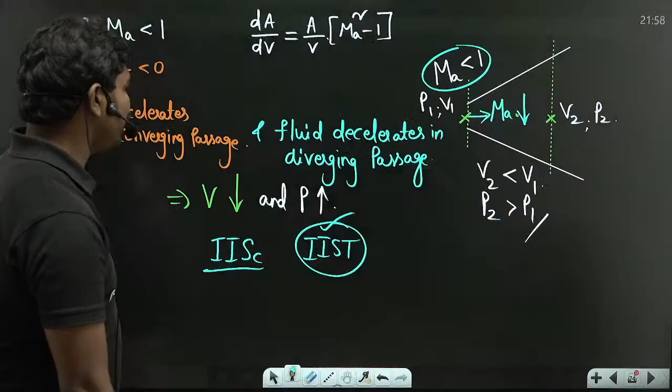Fine, let us see. Heavy water is used in atomic power plants as what? So tell me, what is the answer? Nuclear power plants. So in nuclear power plants, what is the use of this heavy water? Normally D2O, deuterium oxide. H2O is for water, D2O is deuterium oxide. So what is this heavy water's purpose?

Moderator, correct? This is not actually fuel. Normally fuels will be U-235, chain reaction fuels and all. Source of energy, no, because when fuels are bombarded with neutrons, they release a lot of binding energy; those are the sources of energy. It is also not used as a lubricant, because in a nuclear reactor there are normally no moving parts. So moderator is correct. A moderator is used for slowing down the neutrons.

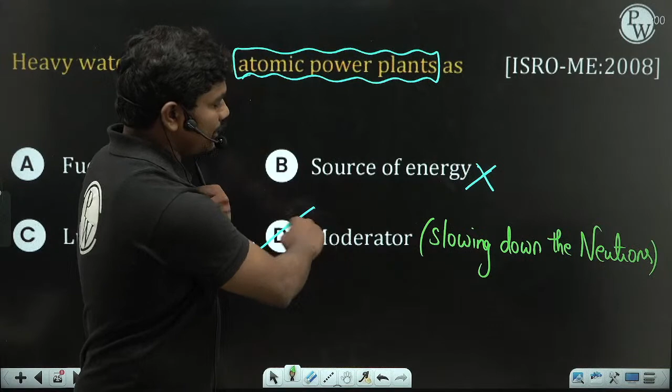Slowing down the neutrons actually. When these neutrons gets, basically these neutrons actually move with very high velocity. So in that case, moderators are used for controlled fission reactions. If the fission reaction is not controlled, then that's what an atomic bomb is - basically uncontrolled nuclear fission. But if you can control the nuclear fission, then this is basically the moderator, it's called the moderator in this case.

Okay, then let us solve this. A rocket exhausts gas with density equal to 0.5 kg per meter cube out at a 50 centimeter diameter nozzle at a velocity of 1200 meters per second. The thrust is dash. So basically Newton's third law of motion, Reynolds transport theorem - if you apply, you will get the answer.

Hi Abhijit, so if you see, what are the subjects that you actually studied in BARC school? There is a big list, but honestly speaking, not this classical thermofluid mechanics that you study elsewhere. There is some - I can't reveal the curriculum outside - but we study a lot about materials, and it also depends, because the course curriculum will not be same at all locations, since some of you might have got recently selected for BARC, the OCES program - orientation course for engineering and science graduates. This OCES syllabus is not standardized for every unit of BARC, it depends upon the functionality of the units. For example, NFC, Nuclear Fuel Complex - since the main point of interest there is fuel production, you will talk about materials, minerals, and basically all this basic thermo subjects will be there. Maths will be there again, you have to study a bit of mathematics as well, because all the simulations and analysis depend on your mathematical understanding. You also study a lot about packing of the materials.

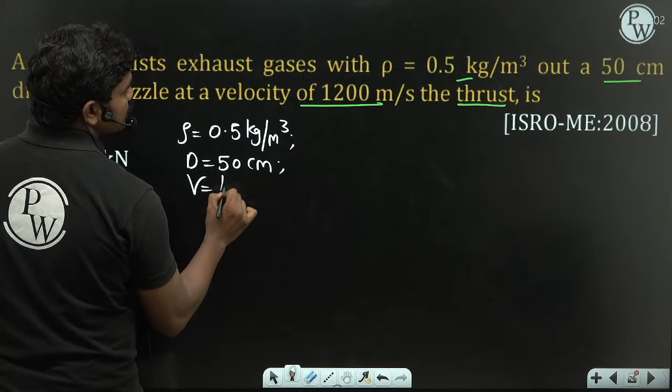Okay, fine, so let us see. This is from 2008, long back when I was almost in 8th class. So let us see: a rocket exhausts gases with density rho equal to 0.5 kgs per meter cube out at a 50 centimeter diameter nozzle, D equal to 50 centimeters, at a velocity of 1200 meters per second. The thrust is dash. Let me talk about the Reynolds transport theorem a bit.

Okay, this is open to atmosphere. Now let us suppose if it's coming out at a velocity V out, and this is coming in at a velocity V in generally. And here the area is A out, for example. So this is area out, A out, and this is A in generally. So let us suppose if this is A in, for example here. Then if you see by Reynolds transport theorem, net force acting...

...or thrust, basically you can say thrust force which is generated in this direction is nothing but minus of force acting on this nozzle - force acting on nozzle. So this force acting on nozzle is nothing but minus of force acting on fluid, basically the fluid here is exhaust gases. So now if you see, this minus and minus goes out. So what about the force acting on the fluid? Rate of change of momentum of the fluid.

So since the nozzle has to be under steady state operation, m dot times velocity at the outlet minus velocity at the inlet. But since nothing is given about the velocity at the inlet, and also practically the inlet velocity will be very less compared to the outlet velocity, especially in nozzles, we neglect this quantity. Then m dot can be written as rho in A in V in or rho out A out V out. So rho out - this is exits with density - so this is rho out V out squared into A out. This square came basically from this extra multiplication of V out.

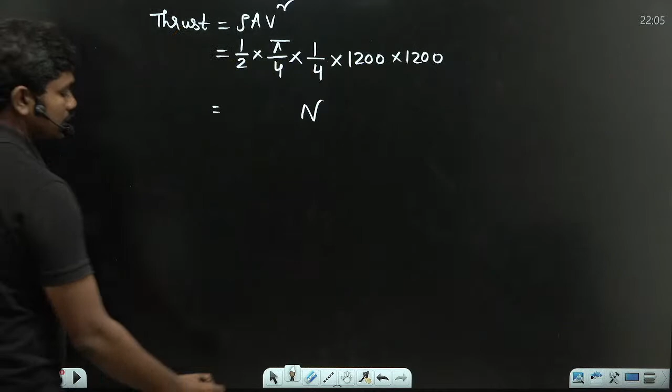So what about the velocity? 1200 meters per second, so 1200 into 1200. This value is going to be in newtons, but the options are actually given in kilonewtons. So whenever this is in kilonewtons, you put a kilo here and delete these three zeros, for example.

Then this 2 cancels this 60 times and 4 cancels this 15 times. Similarly, this 4 cancels this 3 times. So 3 15s are 45 times of pi here. So this is 45 into pi. If you simplify this slightly, 22 by 7 kilonewtons. So this is almost around 6.5.

So 6.5 around, because 6 7s are 42 and 0.5 into 7 is 3.5. So almost 45.5 is there. So 6.5 times of 22 gives you 22 into 65, 110. And this is 2 6 are 12 and this is 132 of course. So 1430 with a decimal, so 143 kilonewtons around.

Something close to 143 kilonewtons. So if you see, 140 kilonewtons. This difference is because we have slightly overestimated this value. Actually when it is 7, this will be slightly less than 6.5, much closer to 6.4. So therefore this value is 140, something close to 140 kilonewtons.

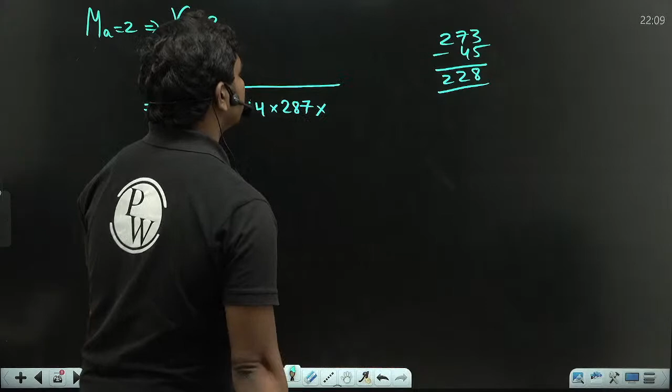So what about gamma? Gamma is how much? Gamma is 1.4 and this is 287. 1.4 into 287 into temperature. What about the temperature in this case? Minus 45 degrees Celsius at that point, so 273 minus 45, so 228 actually here. 228 is the value in this case.

Okay, so let us see what we can do about it. V is equal to, this is in meters per second.

This value is coming out in meters per second, but these options are given in kilometers per hour. So you multiply by 18 by 5, and this value will be coming out in kilometers per hour. If you divide by 5 by 18, you could get converted to meters per second. If you multiply with 18 by 5, this could come out to be kilometers per hour.

Let us see, 2 into this is 1.4. If you approximate this to be 1.414, this could be square root of 2. So this is about 2, but 1.4.

Let us see this 228. If you assume this to be around 225, the square root of 225 would be 15. So 2 into 15 into 1.4 into 287. Let us check what is the value. 287 into 1.4... so this value comes out to be 401.8. If you take this around 400, the square root of 400 is 20. So this is the approximate value, since this multiplication is 401.8.

So if you round off 228 to 225, and 401.8 to 400, in both cases you are decreasing the value. So the actual value will be slightly larger than the value you get here.

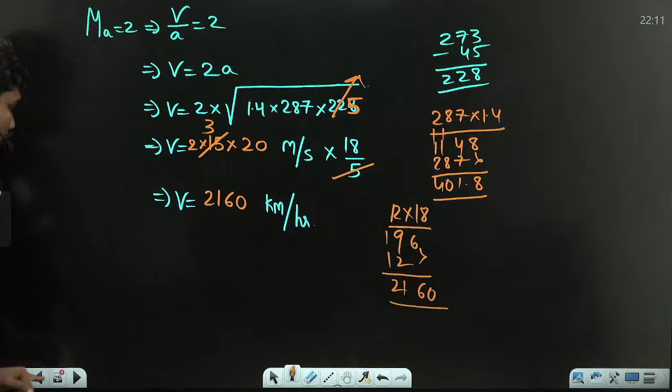So out of the options, 2179 could be the correct answer, because here you have decreased the value, and here also decreased the value. So the value you got is slightly less than the actual value. The correct answer is 2179 kilometers per hour, while 2160 is what we got through small approximations.

Is this clear to all of you? Did you all understand the solving of this question, especially this calculation?

Here we have decreased the values. Instead of 228, we considered only 225. Instead of 401.8, we considered only 400. So whatever calculated value we get will be slightly less than the actual value. The difference is this 19 out of 2100, so that value is very close. It was 2179 kilometers per hour actually.

Is this calculation and solving clear to everyone? Yes, so let us go to the next question.

Hydraulic testing of boilers is done at pressures. I think I have covered this question in the last class, but if some of you weren't there, hydraulic testing is basically called HT. I will tell you the procedure for HT, because I myself have done this test so many times when I was in HPCL.

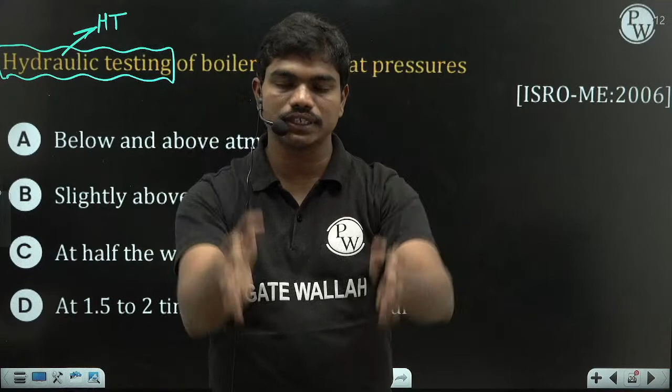Normally, how do you do your hydro test? Let us suppose there is a leak at one location in a vessel. Now you go for maintenance and close that leak. After closing that leak, you will fill the vessel with water completely, and also at high pressure. Normally, how will you fill it at high pressure?

Let us suppose the volume of the tank is 10,000 liters, or let's say 10 meter cube. So 10 into 10 meter cube is the volume, meaning 10,000 liters or 10 kiloliters of water. Instead of filling just 10 kiloliters, you will fill some excess water so that it creates high pressure inside the vessel. Then we check whether the device on which you've done maintenance will hold that high pressure or not.

Okay, and normally the pressure at which you do that hydro testing is almost 1.5 to 2 times of the working pressure for any device. It can be a boiler or some other device, it can be some pressure vessel, whatever. So the normal range is 1.5 to 2 times of the working pressure. Okay, I will show you some hydro testing equipment.

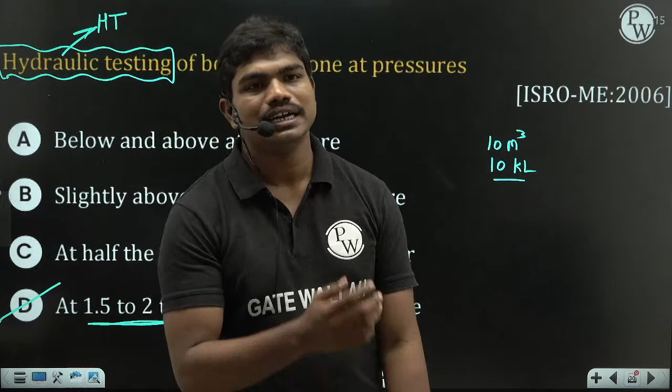So 1.5 times pressure for how many hours? Depending on the criticality of the device, normally for 6 hours, 8 hours, we will hold it. Some equipment might not be very critical. Of course, we cannot afford any leaks, but even if by accident it happens, still that's okay. Let us suppose there is a pipe carrying water and it developed some leak, then you will lose water, that's it.

But let us suppose your pipe is carrying petrol, motor spirit, MS. If it is carrying MS and it gets a leak, then definitely that leak is more critical compared to the water leak. So every device has its own criticality. Normally you categorize them as less critical, critical and super critical, and maintenance is done as per that. Okay, so let us solve this.

An air conditioned room has one of the walls which is 5 meters by 3 meters of 3.75 centimeters thick brick. This is a thick brick, of course. So now you can see here, there is a wall like this. There is a brick of some thickness. This is a very old question, 2006, long back.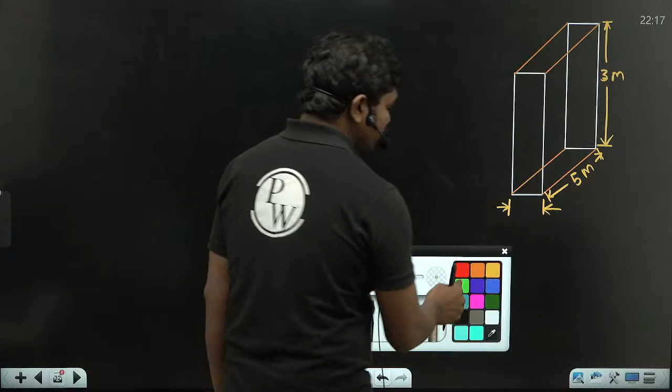So the air conditioned room has one of the walls which is 5 meters by 3 meters. Normally the length of the wall will be more, so let us suppose this is 5 meters and this is 3 meters. Now the condition is 3.75 centimeters thick. So this is 3.75 centimeters thick.

The conditioned space is maintained at 27 degrees Celsius when the outside temperature is 47 degrees Celsius. So outside it is 47, means this surface is at 47 degrees Celsius. And the inside temperature, this value, is 27 degrees Celsius. So there is a temperature difference, because of which heat will flow into the air conditioned space from out

to in. Variation of thermal conductivity with temperature of the wall is given by K = 1 + 2 × 10^-4 T. So K will be in watt per meter degree Celsius.

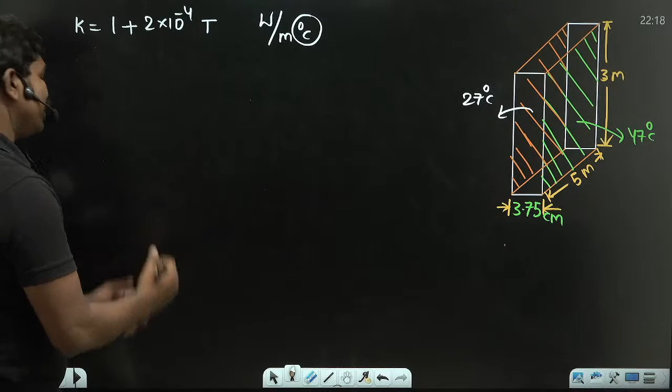So that's why this difference can be in per unit Kelvin or per unit degree Celsius. The difference is the same, in degrees, and K is in watt per meter Kelvin. So if you want to convert this, then definitely this T has to be replaced.

The heat gained by the conditioned space through the wall. This is actually a question of heat transfer. They're just asking you what is the heat flow rate through one-dimensional conduction. Because of this space present here, there is some conduction of heat inside. So they are asking you what is the value of this Q dot in this case. So let us see.

Q dot is equal to minus K A dT by dx. Now this can be written as Q dot by A times dx is equal to minus K times dT. When you integrate this, K is in watt per meter Kelvin and T is temperature. If you want to treat this in Kelvin, then K should also be in watt per meter Kelvin.

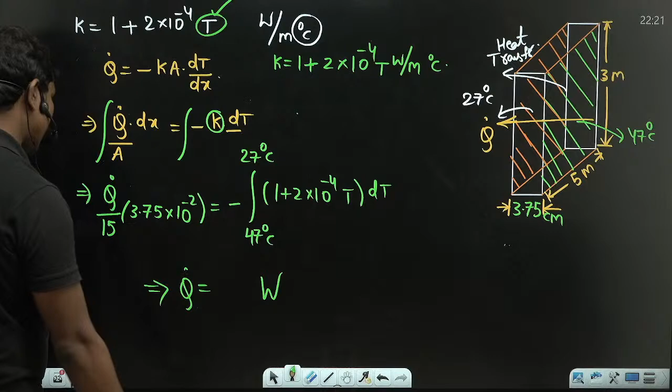So let us see. Q dot is equal to some watts. Let us see what they are asking: the heat gained by the conditioned space. The options are 850 watts, 85 watts and 800 watts. So please calculate this value and tell me what it could be.

Please type in the chat box, because this calculation you can do. So Q dot by 15 times 3.75 into 10 power minus 2 is equal to the integral from 47 to 27 of 1 plus 2 into 10 power minus 4 T dT. This dT will be the same in degrees or Kelvin, and since the temperature is in degrees Celsius, we can use the same calculation. So please calculate and tell me the value.

How much value are you getting here? Type in the chat box. You have to calculate the T squared by 2 term. So will you do this calculation, yes or no? Because there is one more question.

Normally the temperature difference is 27 and 47 and 15 meter square. 15 meter square is a very large value, so it comes, I think, somewhere around 800, within that range. 800 to 850, somewhere in between, that you can get from the calculation. Okay, so please do this calculation because it involves a bit of calculation. So 47 square minus 27 square by 2, these kinds of things. So please calculate this value. Okay, next let us see.

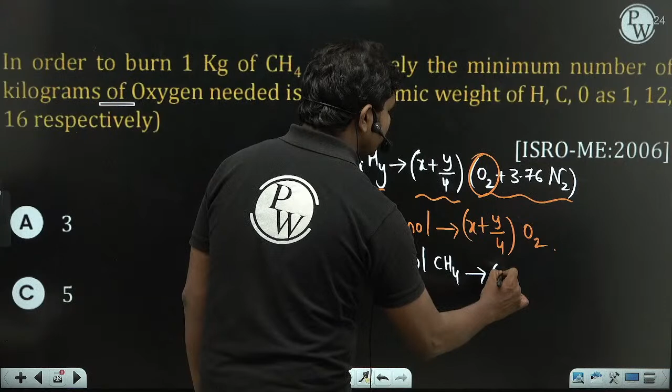Okay, so you can see this is the number of moles. So for 1 mole of CxHy, you need x plus y by 4 moles of this air, so basically that many moles of O2 is required. Now they are asking about burning 1 kg of methane. For 1 mole you need x plus y by 4 moles of oxygen, correct? So here the component is methane. For 1 mole of methane, you need 1 plus 4 by 4, because methane has x equal to 1, y equal to 4. So 2 moles of O2.

So 1 mole of CH4 means 16 kgs of methane needs 2 moles of oxygen. Oxygen molecular weight is 32, so 32 kgs per kilomole. So 16 kgs of methane needs 64 kgs of oxygen. If you divide this, this is 4. That means 1 kg of methane needs 4 kgs of oxygen for complete combustion. This is the standard combustion equation: 1 mole of any hydrocarbon CxHy needs x plus y by 4 moles of O2 plus 3.76 N2, which comes from the air composition.

Clear to all of you? So please type in the chat box. Is this clear? The combustion equations.

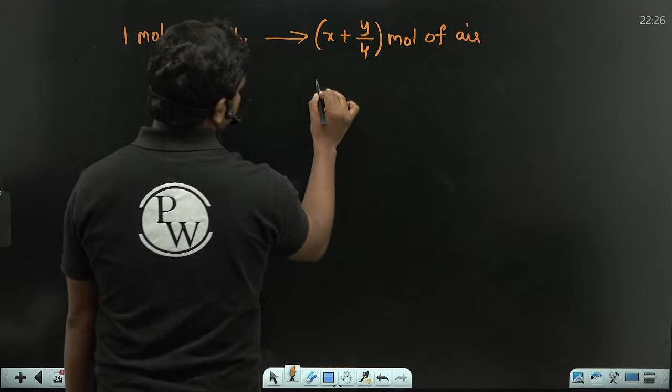Okay, because here they are not worried about the products. They have given you methane and are asking about the reaction. So this is the standard thing, please keep this in mind. 1 mole of any hydrocarbon, for example CxHy, requires x plus y by 4 moles of air for complete combustion. So since it is methane, CH4, x is equal to 1, y is equal to 4. That's it. So that's what I have done here. Clear?

So this is the standard combustion equation, and depending on the fuel, like methane or LPG, propane, if you are burning C3H8, then again you will have the values accordingly. Normally the majority of substances you burn in general, LPG and so on, are alkanes. So what are alkanes? Basically the composition CnH2n+2. These are propane, butane, isobutane, the things you burn in your house.

Okay, clear to all of you? So please type in the chat box. Is this clear to everyone? Okay, yes. So let us go to the next question.

Okay, so I think we are discussing papers up to 2006. Before that we don't have the papers. Fine. So here these are the questions.

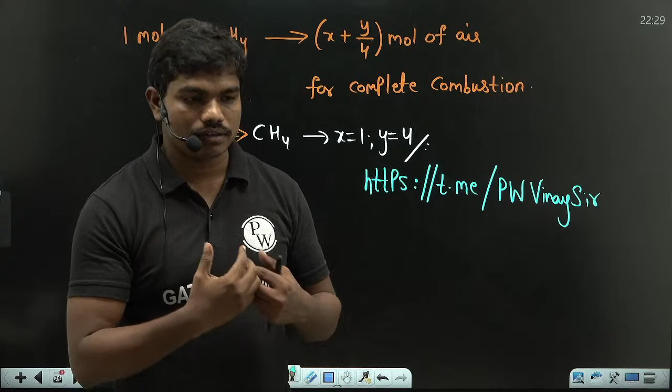Do you recommend again to join ISRO? Look, the difference between Vijay and ISRO, I'll tell you honestly. Vijay is completely intended for the GATE examination. The levels of exam, the kind of questions that come, will be different. GATE is more analytical, a lot of calculations, very in depth. Of course, even in ISRO you should have knowledge, but GATE is completely analytical. And Vijay is a long batch. We will go through everything in detail and solve a lot of numericals.

ISRO is very crisp theory. We will touch up the concepts very soon, then talk about the important points, and then start solving some problems. So there's a difference, but it's on your part to decide. ISRO is a short-term thing which gets completed within the next 55-60 days, so that you will be ready for the examination.

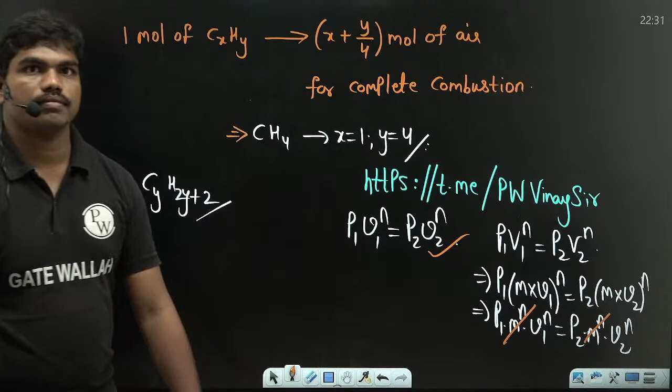The reason is, if you write P1 times (m V1) whole power n equals P2 times (m V2) whole power n, then it is P1 m^n V1^n equals P2 m^n V2^n. You can use anything, but generally we write in intensive terms to apply them to both open and closed systems. The equations are the same. Even for closed systems, whether you use specific volumes or total volumes, it is the same. Okay, Vijay?